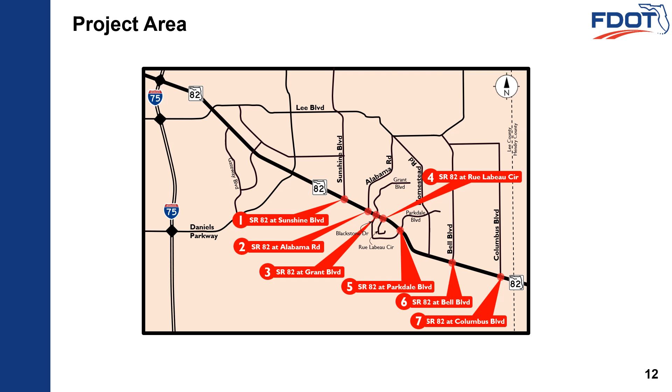SR 82 is a 4-lane and 6-lane divided roadway with a grassed median. The posted speed limit is 55 miles per hour from Sunshine Boulevard to west of Bell Boulevard and increases to 60 miles per hour from west of Bell Boulevard to Columbus Boulevard.

The project is intended to increase safety along SR 82 by managing access at these intersections. To reduce crashes and improve safety, the full median opening at each of these intersections will become a 2-way directional median opening. These interim safety improvements will simplify the decision-making for drivers by reducing the conflicts and crashes within the median openings.

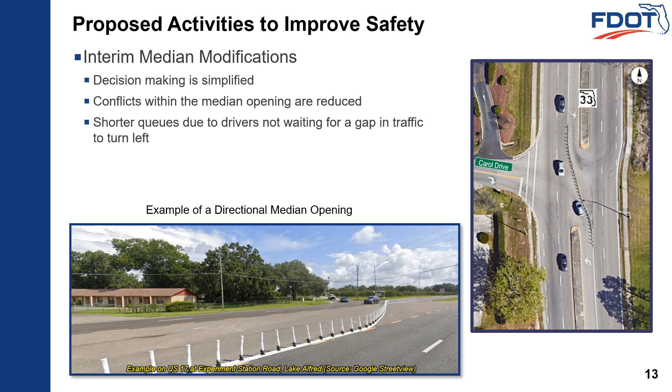Conflict points are areas where vehicle paths legally cross within an intersection. For example, when one vehicle turns left from a side street, it must stage within the median opening and merge into the path of vehicles already heading straight on that roadway. This requires vehicles traveling in different directions and speeds to share the same space. Crashes are most likely to occur at these conflict points.

This graphic illustrates how the number of conflict points changes when converting a full median access to a two-way directional median access. This reduces conflict points by restricting through and left turn movements from the side streets. These side street movements are redirected to turn right onto the main roadway, followed by a U-turn at an adjacent median opening. This is called a restricted crossing U-turn.

With a restricted crossing U-turn, drivers stopped at the side street waiting to cross or turn left no longer must navigate a complex intersection with two directions of traffic, often traveling at high speeds. The restricted crossing U-turn results in a 54% reduction in injury and fatal crashes.

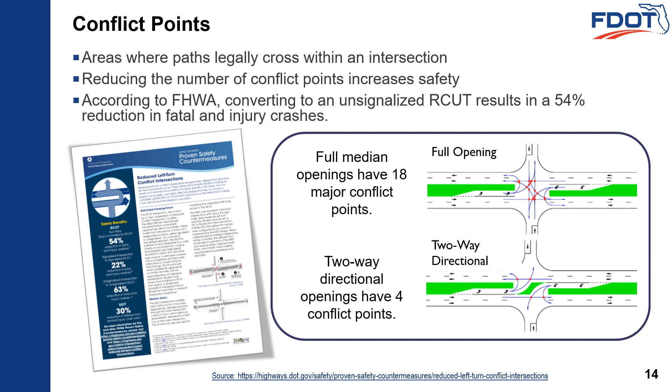Specific to the intersections on SR 82, the frequency of gaps provided in eastbound and westbound traffic is not sufficient to accommodate the northbound or southbound left-turning volumes without increasing conflicts with eastbound and westbound left-turning vehicles. A full median opening allows left turns for vehicles from each intersection approach along the main roadway and side streets. Turning vehicles would maneuver in a shared space with many conflict points within the median opening.

A two-way directional median opening is configured so that only vehicles traveling along the main roadway can access it to make a turn. Left turn and through movements from side streets are removed. On an east-west main roadway, there would be one directional opening for eastbound left and U-turning traffic, and a separate directional opening for westbound left and U-turning traffic. This configuration has fewer conflicts and provides improved visibility by managing the placement of vehicles within the median.

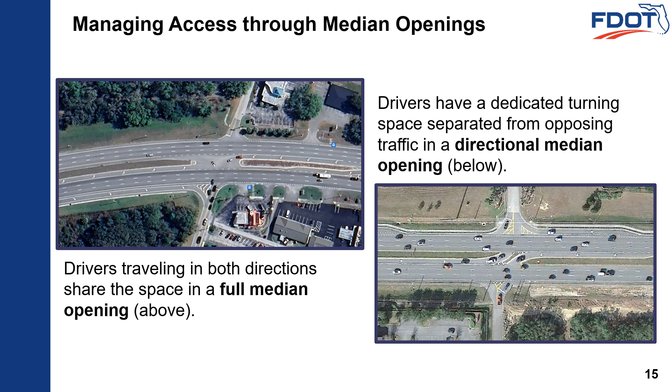We'll now discuss each of the intersections. Each slide will provide the interim improvement concept, the historical crash information, and rerouted turning movements. At each location, northbound and southbound left turning and through movements from the side streets will be rerouted to median openings to the east and west. These details, along with the collision diagrams, are provided on the individual intersection display boards.

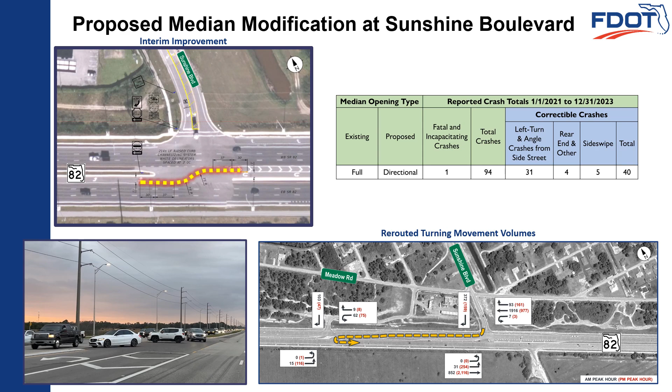At Sunshine Boulevard, from year 2021 through 2023, there were a total of 94 crashes that resulted in one fatal or incapacitating injury. Based on the historical crashes, eliminating left-turn movements onto SR 82, 40 crashes would be considered correctable at the intersection.

The ultimate intersection improvement is being implemented by Lee County as part of the Alico Road Extension Phase 2 project. The intersection will be reconstructed to a partial displaced left-turn configuration. The county plans to hold a public meeting in the summer of this year, with construction currently scheduled to begin in mid-2026. Information on this Lee County project can be found at www.alicoroadextension.com.

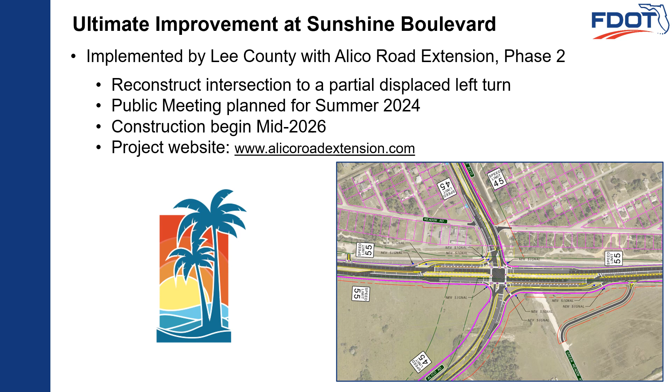At Alabama Road, from year 2021 through 2023, there were a total of 93 crashes that resulted in 6 fatal or incapacitating injuries. 12 of these crashes would be considered correctable with the interim improvements.

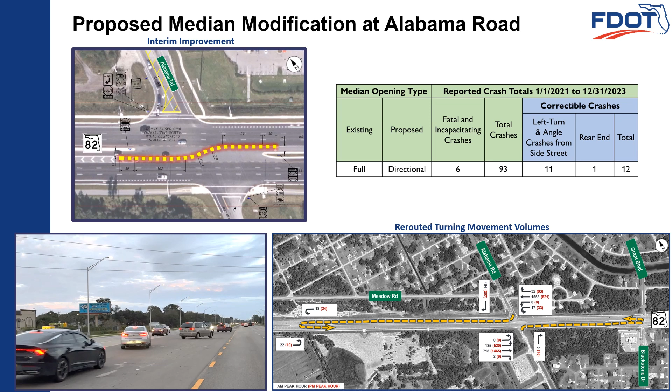At Grant Boulevard, Blackstone Drive, from year 2021 through 2023, there were a total of 52 crashes with no fatal or incapacitating injuries. 35 of these crashes would be considered correctable.

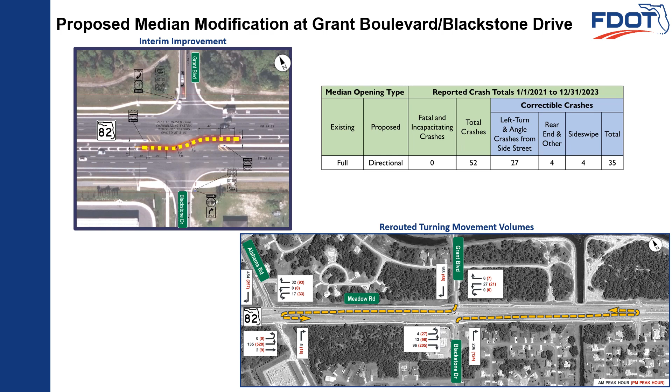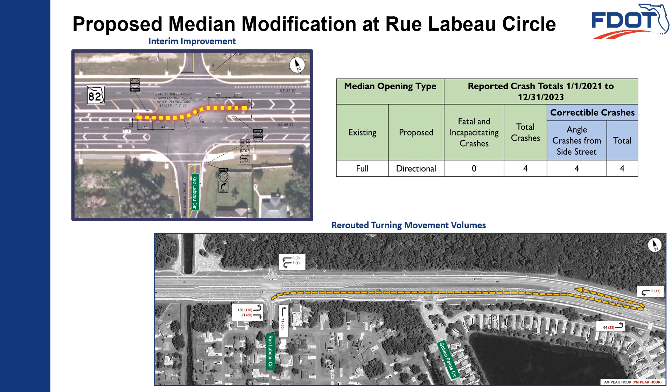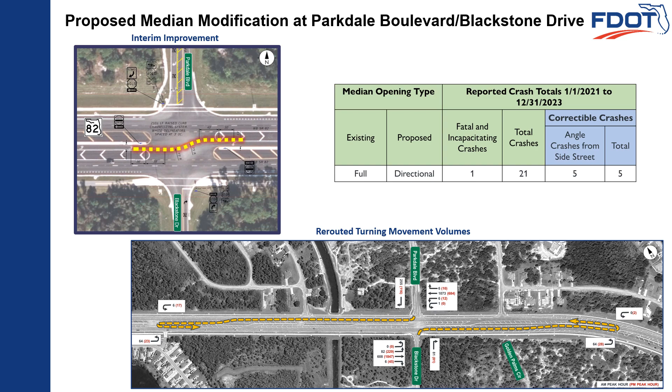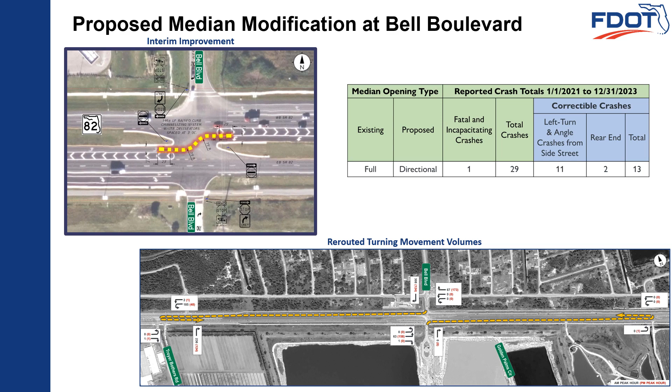At Bell Boulevard, there were a total of 29 crashes occurring in the 3-year period, with 1 fatal or incapacitating injury. 13 of these crashes would be considered correctable.

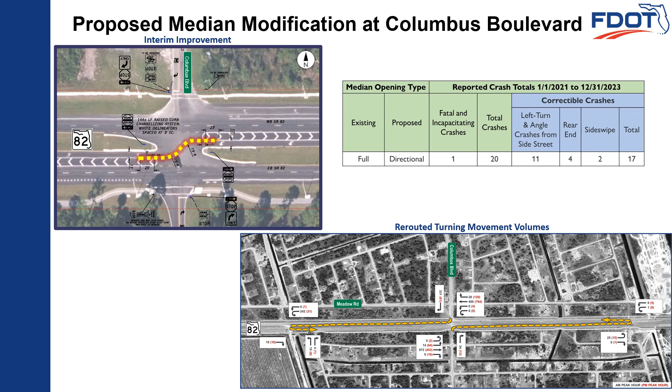In order to quickly reduce crashes and improve safety at the 7 intersections, FDOT plans to install the interim median modification in the summer of this year. Lee County will begin construction of the Alico Road extension in mid-2026, which will include the reconstruction of the Sunshine Boulevard intersection. FDOT will continue to evaluate ultimate intersection alternatives, including traffic signals and other configurations that will reduce left-turn conflicts at the remaining 6 intersections.